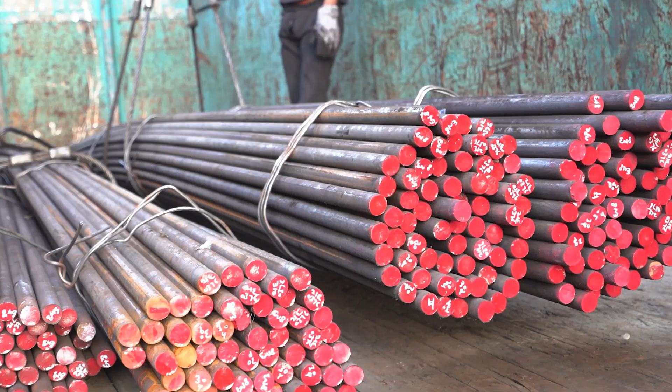Also, we would be moving not only into cold forging but possibly hot forging, so we can meet the entire spectrum of need based on our customers, both domestic and global. We receive raw material bars as per our technical delivery condition from customer approved sources. Total 30 different grades of raw material is received at Roop Auto Forge for further processing.

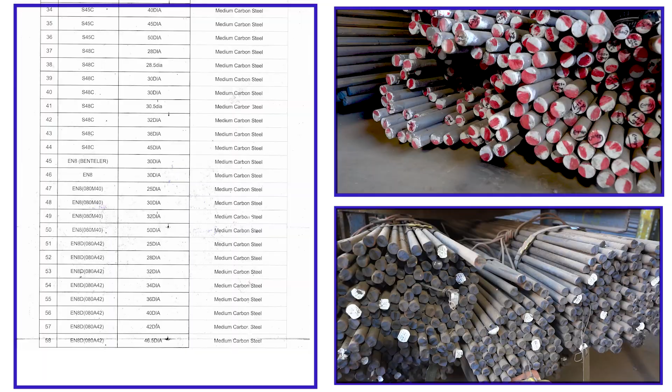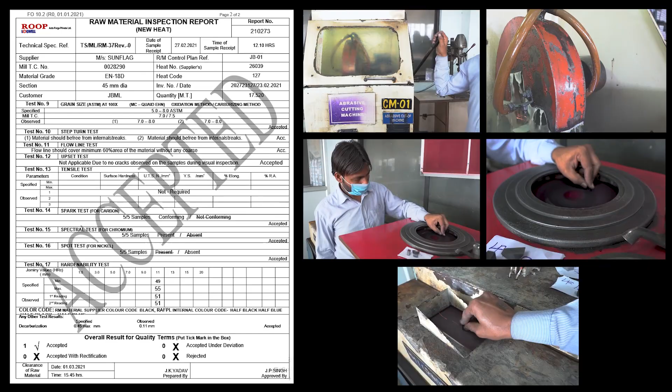Raw material is stored under shed to prevent it from rust. For raw material approval, we are capable of conducting 27 different types of tests for confirming its properties. After lab approvals, raw material is shifted to identified location along with tag and inspection reports. Colors are applied to both ends of the raw material bar as per color chart board. One side color designates material grade, other end designates steel supplier's color.

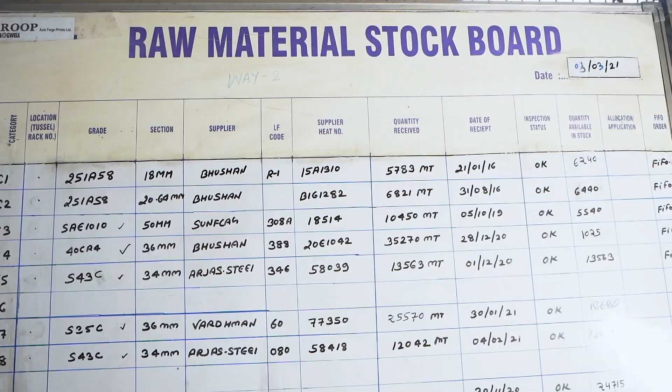Centralized FIFO boards are maintained for all raw material grade and sections along with raw material stock. Raw material is issued online as per FIFO criteria. Corresponding to FIFO board, FIFO tag is also displayed on all raw material bars.

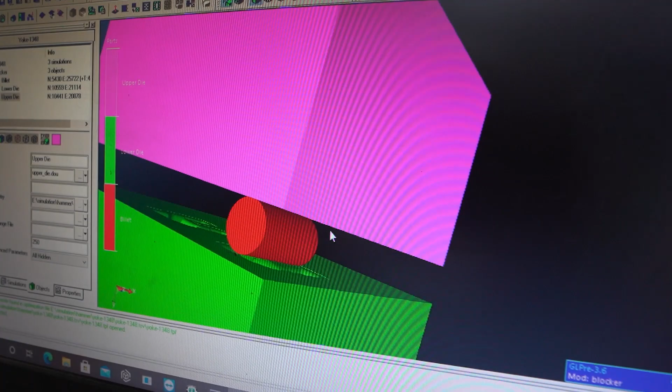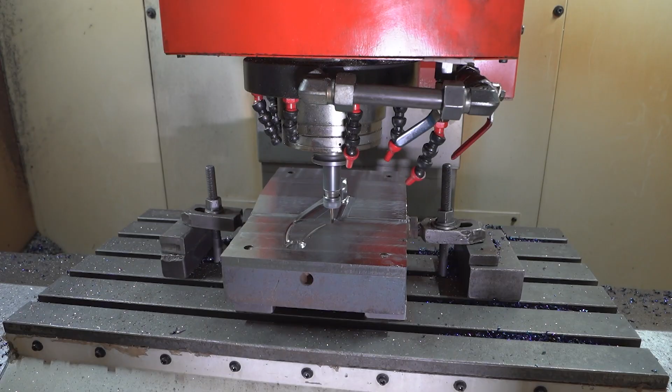We develop 3D model for part using Unigraphics and Forge 11 simulation software to optimize the die and tool design for smooth grain flow, input weight, and to reduce defects such as underfilling, fold, lap, etc. In-house tool room is equipped with vertical milling machines to manufacture all tools and dies. Our forging facility is equipped with induction heaters.

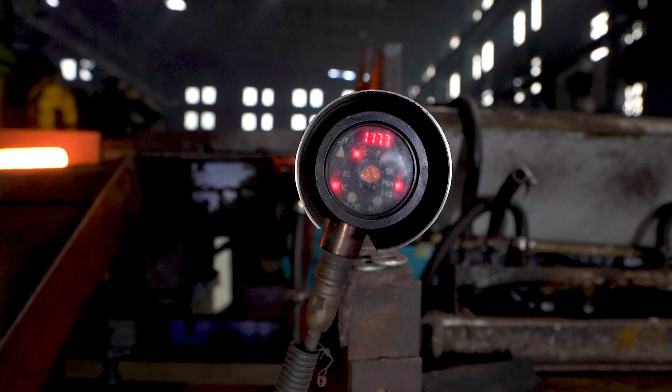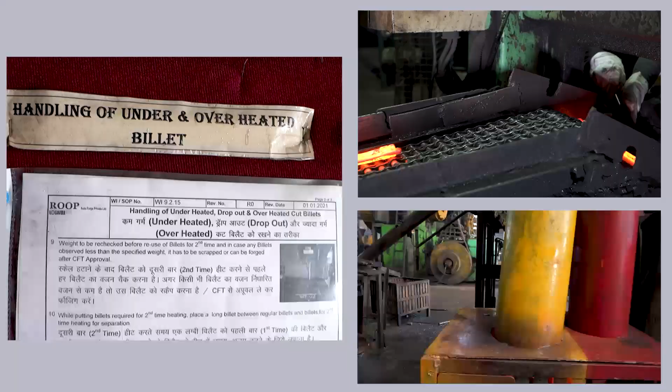After heating, billets are automatically segregated for overheat, underheat using double color infrared radiation pyrometer. Overheated billets are collected in locked red bins and underheated billets in yellow bins for further processing. Overheated billets are scrapped and underheated billets are reheated one more time as per company rule. Process parameter setting console is locked to make it tamper-proof.

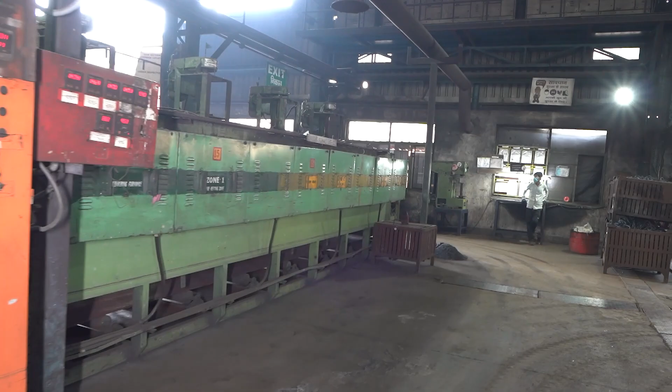After forging, parts are transferred to conveyor to avoid hot part handling. Parts are transferred from conveyor to bin through sloped chute to avoid impact and deformation on red hot parts. We have conveyorized continuous furnace to meet our heat treatment requirements. Our furnaces are equipped with multiple convector motors to maintain uniform temperature inside furnace.

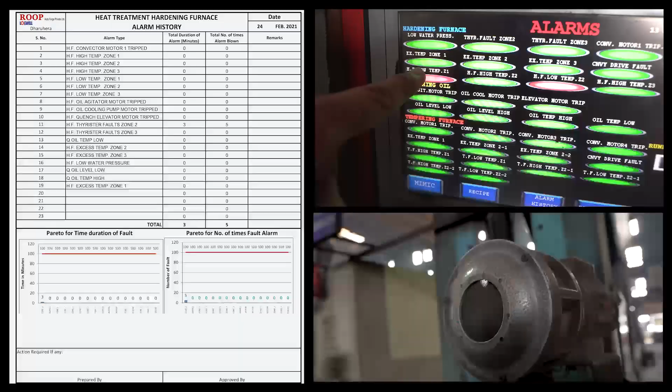In our heat treatment furnace, human intervention is minimized with the help of human machine interface HMIs. It governs and records the furnace operation, alarms and data using 35 different sensors such as low high temperature, conveyor speed, convector motor RPM, etc.

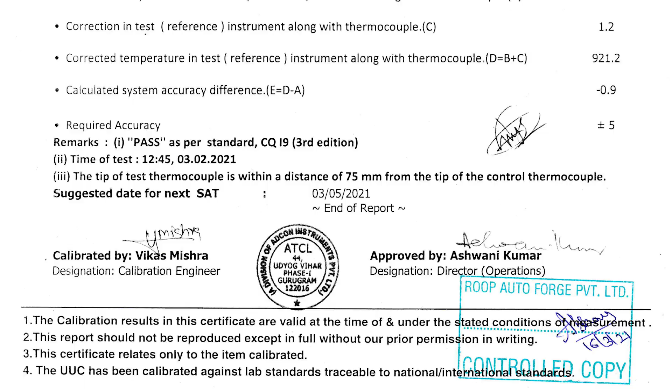Temperature Uniformity Survey TUS is done yearly and System Accuracy Test SAT is done quarterly to ascertain that furnace accuracy is maintained. Heat treatment facility is approved by Tier 1s and MSIL. Also CQI-9 standard implemented and followed.

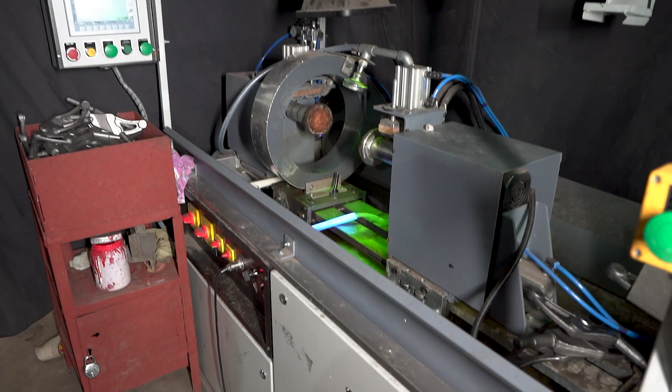Fully equipped lab is available in Roop Auto Forge for conducting destructive and non-destructive tests such as chemical composition, hardness, microstructure, grain size, inclusion rating, Jominy hardenability, grain flow, magnetic particle inspection, eddy current, ultrasonic testing, etc. Acceptance and rejection limit microstructure images are defined and displayed in lab. Specimens of raw material and heat treated parts are stored for identified period.

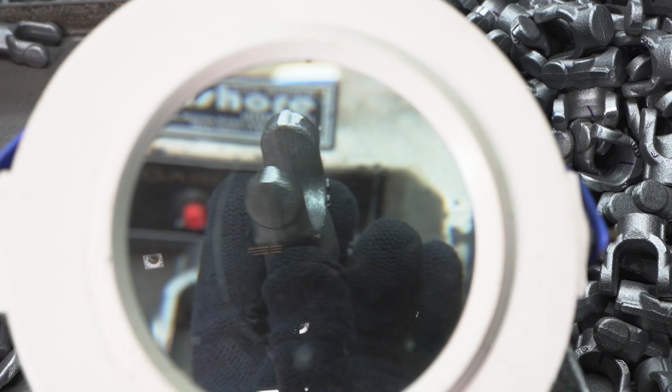We are doing visual inspection for crack, underfill, short fill issues and also conducting dimensional check for OK, oversized, undersized parts. All parts produced in Roop Auto Forge are checked using magnetic particle inspection to avoid customer complaints for crack.

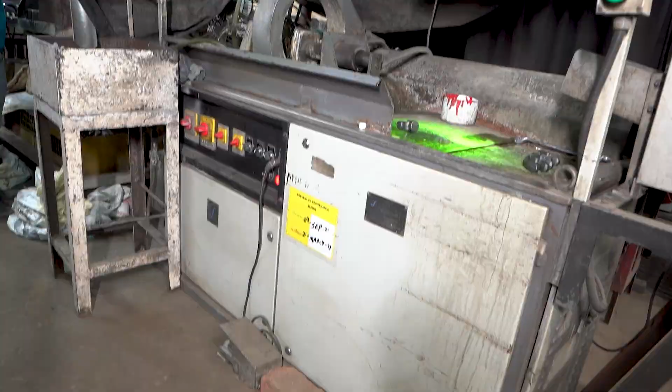We recently did a Kaizen and added non-touch type MPI machines where there is no need to hold the part for inspection of crack. Clamped magnetized parts are rotated while under inspection of black light to detect crack. Machines are having alarms for low current, high current.

Inspector fatigue management is exercised using timer and alarm system, which rings after every 45 minutes, and different inspectors are deployed on machines. Inspectors are minimum ASNT level 1 certified. We have state-of-art eddy current testing machines with auto gate sorter for hardness, material grade mix-up, wrong heat treatment. We also have ultrasonic testing facility to detect internal cracks.

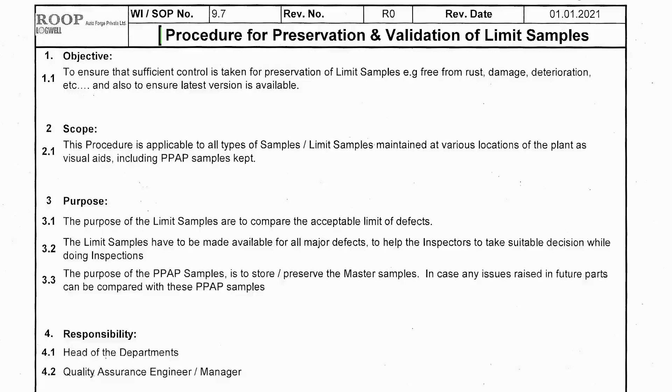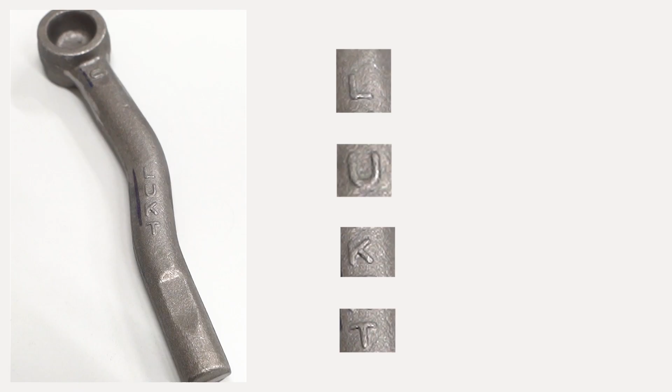Limit samples are used, displayed at required station and revalidated every year. We implement part traceability system using letter embossed on parts through dies. For example, LUKT, where L denotes Roop Auto Forge, U denotes steel mill, K denotes the heat from the steel mill, and T denotes code for production lot sequence.

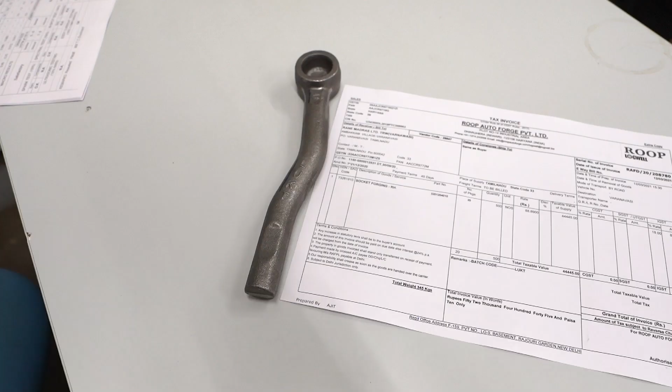This way we can track back the details of production, process controls used, and inspection details of the lot. This batch code is linked with invoices as well. We are very thankful to our customer. We are where we are basically due to the guidance and support of our customers.